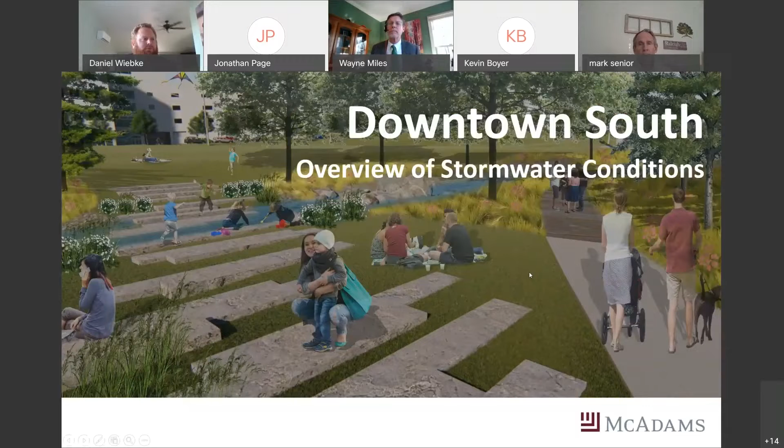All right, so I'm Daniel Wiebke, as Jonathan said, stormwater engineer, professional engineer in the state of North Carolina, starting working on the Downtown South project. Downtown South is a project being undertaken by multiple entities, but Kane Realty is the primary developer. So, slide.

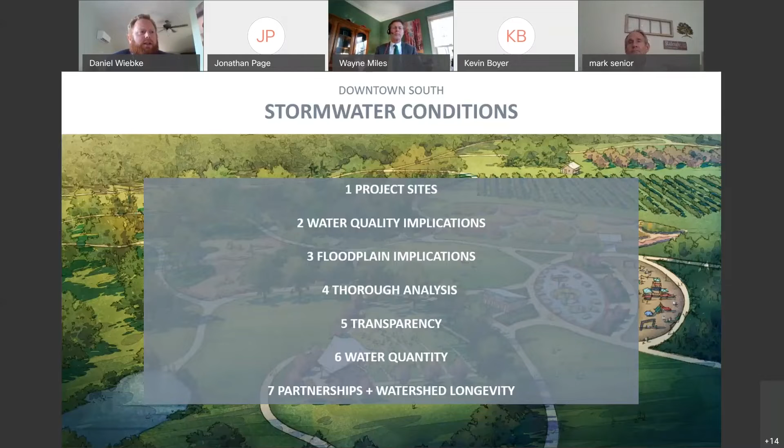So there are 7 major conditions that we've talked through with Planning Commission and stakeholders. There's definitely been some stakeholder engagement, talking to nonprofits and such, and I'll talk about that more later. But I'm going to show you where the sites are. I don't know if you're familiar with those. Some of the water quality conditions we've discussed, the floodplain ones we've committed to, very in-depth analysis of the site and the greater watershed, some transparency from the development team as the process moves forward, water quantity, and then partnerships and the longevity of the watershed beyond just the project itself. So I'll get rolling. Next slide.

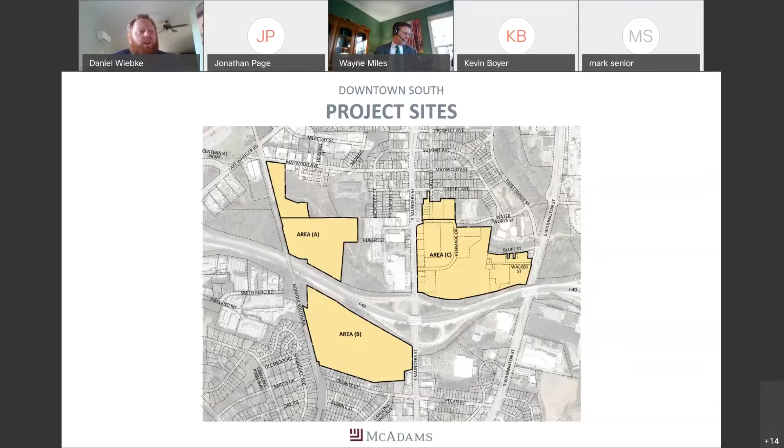So you'll see here that there are 3 major tracts: area A, B, and C. As I'll show you later, areas A and C are on Walnut Creek. B is to the south of 40. Drainage comes from area B, both to the northwest and northeast, through linkage by Wildcat Branch, which is also, I believe, a FEMA recognized stream. So there are definitely natural water bodies and stormwater implications with this project. The total area between all 3 parcels is, I think, 148, 150 acres, something like that. So definitely a large project. Next slide.

But then we had some external discussions with some stakeholders and another engineer, Chris Bass, who had written a letter on behalf of some of the neighborhood residents. We've had great conversations with Chris, members of One Way and Partners for Environmental Justice and some other stakeholder groups, to name a few.

After talking to them, we stepped it up a bit. Since stream degradation is one of the big points Chris Bass and the community were really worried about, we said we'll go ahead and treat the difference in the 1-year storm pre to post, so make it no worse in that storm. If for some reason there is a greater difference than that and the 1.34 inches...

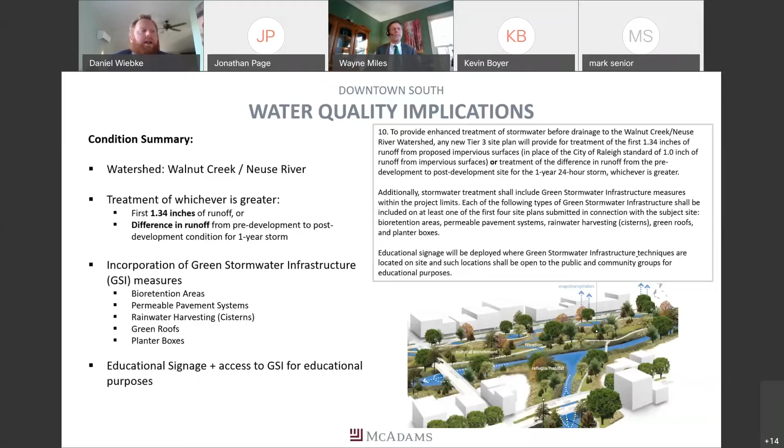Again, we will also be incorporating green stormwater infrastructure measures. We think it's very important to put those on site and create educational opportunities, to leverage not only the development but also the city of Raleigh's desire to push this program forward.

One of the implications is something the SMAC had advised on last year, maybe, that there's a text change coming for floodplain. So essentially we have adopted that, though the text change for floodplain is not through yet. We've gone ahead and said we'll be compliant with that.

Essentially, not really doing anything in the floodway, but in the floodway fringe, trying to reserve that for ground level uses. Really, the best thing to use there is parks. There may be minimal trails and a picnic shelter or something like that, but we're really trying to keep the building footprints outside of the floodplain and floodway fringe to prevent any kind of losses or obstructions to the floodplain.

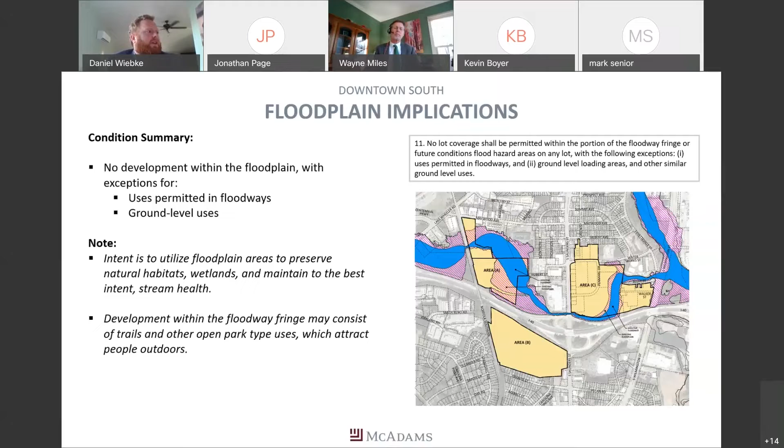We and the stakeholders discussed this, and in particular I'll mention Chris Bass again, because he's represented a good many of them from a professional standpoint. He's also a stormwater engineer. So we've had really good discussions, and our goal is to make things better if at all possible, and certainly at the least not make anything any worse.

With that, we talked about some different storms to look at, and what we wanted to do was say, well, we don't know everything now. At rezoning there may be some site sketches, but there's no detailed analysis of all the on-site conditions. Just for 150 acres, that's a huge burden. So what we wanted to do was set up a framework in which we could look at what the development would do through the process and make good decisions.

So with that, we kind of did some if-thens based on what the analyses show as we move through those. Knowing there are 3 sites, we may be at a more detailed stage with one than another. We're not going to know everything at site A when we're working on C, but as site plans for sites A, B, and C come in, we'll be updating that analysis, constantly ensuring we're doing what's best for the area.

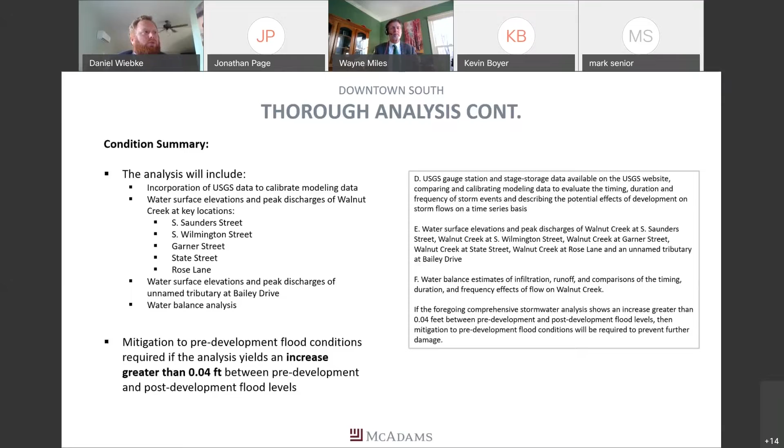So again, we'll be looking at water surface elevations, velocities, and generally the peak flow coming through there. One caveat is that mitigation to pre-development flood conditions will be required if the analysis yields an increase greater than 0.04 between pre-development and post-development flood levels. That's in the ordinance, but just echoing it here—this is measurable, and beyond 0.01, 0.02, not to get too technical, sometimes that can just be a modeling thing. But once we start seeing something a little greater than that, that's actually measurable and you might see a real world impact. So that's where that came from.

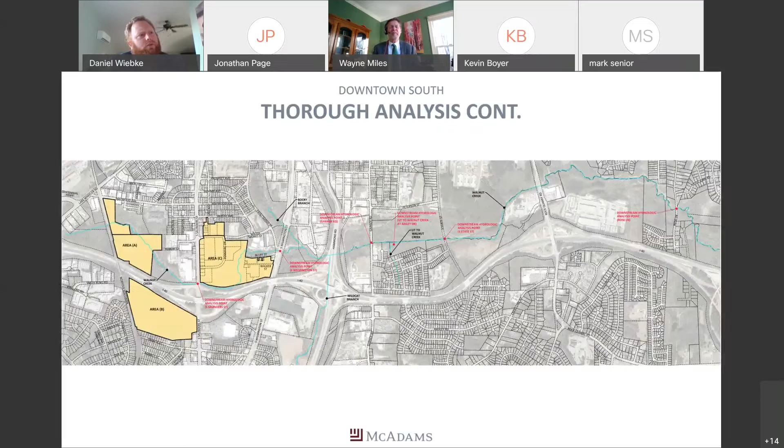Next slide. So these are the points. Again, the first red area is South Saunders. The next red dot is Wilmington. The next red dot is Garner, then State Street, and then the furthest to the right there is Rose Lane. Next slide.

Another part of this is transparency. As we go through this process, once we've got calculations pulled together, we submit to the city, but we also want to keep it accessible, not jumping through hoops for people to get access to the information. So plans, sealed calculations, that kind of thing, we'll host on the website. The website's actually live. If you go to the Downtown South website, at the bottom there's a 36-page pamphlet, and the zoning conditions thus far are already in that pamphlet. So if you want to see the full list, they're there.

Water quantity is probably the thing most people want to make sure doesn't shift or change too much. It's about making sure peak discharges during storms do not get worse or exacerbate problems that already exist or create new ones. We've already done some preliminary analysis showing that in some situations, letting water out a little quicker in certain areas may actually help the watershed so it doesn't line up with other parts of the watershed, but in other instances it may not. So we wanted to build that variability into the ability of the development and the review process.

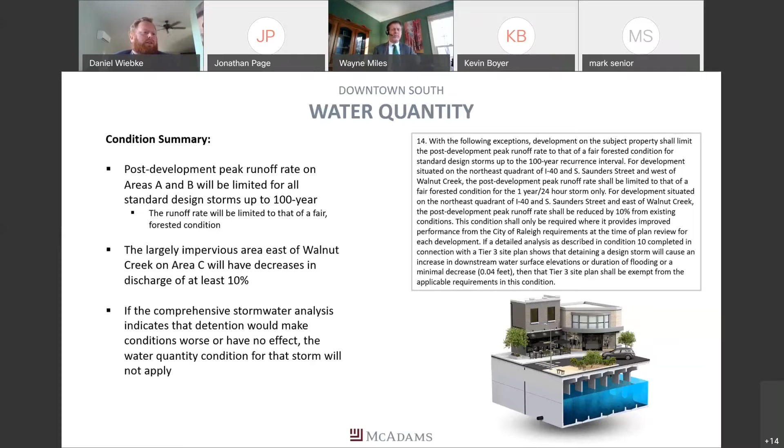Lastly, if the comprehensive stormwater analysis shows that holding back the 10-year storm will hurt things, but we need to detain the 25-year storm, then that's what we'll do. Essentially, we've agreed to these conditions, and we want to do what's best for the creek because it's best for the creek, not just because it says we're going to detain the 25-year storm whether it's good or bad. That's really the thought process we have in mind here.

So the last point here is partnerships and watershed longevity. This is really just a commitment by the developer to positively impact the watershed.

After the second site plan is approved by the city of Raleigh, 5 business days later they will put $150,000 in an account that can be used to match another grant to be implemented within the Walnut Creek watershed. So they build a building or two, start getting some revenue in, and then they're able to help fund other projects. This isn't related to our project—these are other projects in the Walnut Creek watershed that would improve water quality, mitigate flooding, restore streams, and restore wildlife habitat.

To put that in another light, they put the $150,000 in there, and maybe a year or two later there's a huge project that costs $1 million. After multiple site plans, once the $150,000 builds up, it could reach a maximum of $750,000. Now what could happen is somebody else comes in with $750,000 and matches that, so you've got $1.5 million. That could fund a project like raising a road that's flooding downstream, or making a culvert larger, or creating an impoundment.

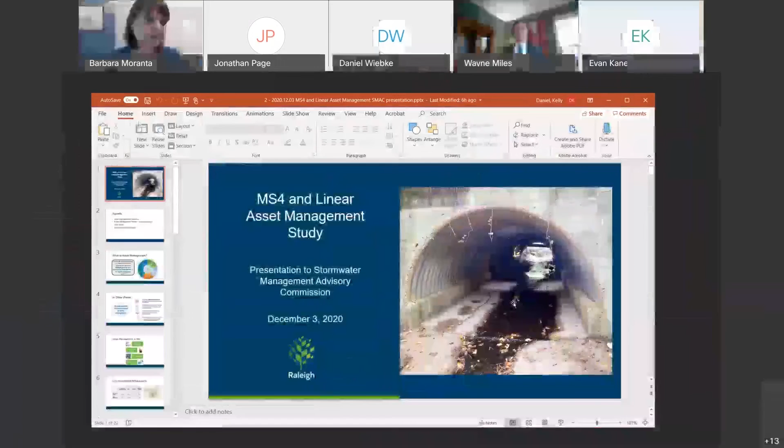I'll start off with an overview talking about what asset management is, what assets we're managing, and what our system challenges are. Then I'll turn it over to Chris to talk about our phase 1 asset management project, which kicked off in July. Then we'll discuss next steps, and we welcome your feedback. So we have time at the end for questions and discussion. Next slide, please.

Okay, so what is asset management? We'll start with the definition in the box, and then talk about what that means for Raleigh Stormwater. Asset management is a way of doing business that allows utilities to achieve the desired level of service, an acceptable level of risk, at the optimal life cycle cost. So you may be asking, well, what is this way of doing business, and how is this different from what we've been doing for many years?

In actuality, we have been doing many pieces of this asset management process. So what we're doing with the asset management program is building upon what we've already been doing, and also developing in a more formal way, a method to evaluate priorities and system risk. We'll spend a few minutes going through this asset management process shown in the circle on the right-hand side of the slide, and talk about what that means for Raleigh Stormwater.

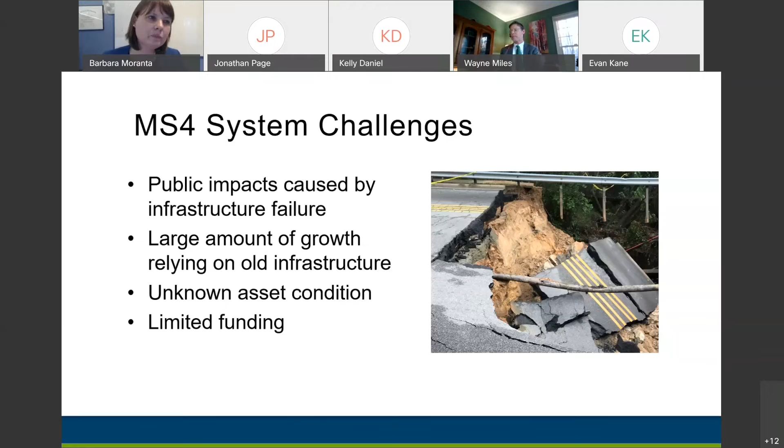Which leads to our next challenge: our asset condition is unknown, and we need to go out and inspect it in a cost-effective way. Funding is also a challenge, and this is not uncommon for any municipality with aging infrastructure. We need to get a better understanding of our funding requirements that will allow us to create a more proactive program.

And with that, I'll turn it over to Chris Nesbit with CDM Smith to talk about our phase 1 project. Thanks, Barbara. Okay, so there were three important questions that we wanted to make sure we answered as part of the phase 1 project: what is the basis for funding needs, where to go spend the money, what are our priorities, and then how to proceed from here and getting into the details. I'm going to be talking more about each one of these.

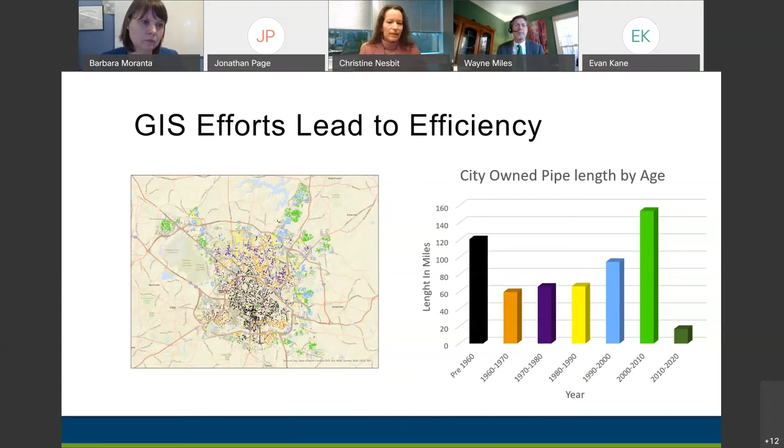Next slide, please. I wanted to go over a couple of those best practice assumptions that we're providing now and will refine, with two examples. First is the condition assessment. Right now, based on what we know, we'd recommend assessing 10% of the system per year for the next 10 years. So in 10 years, Raleigh would know the condition of all of their assets.

The cost of doing that depends a lot on whether you need to clean the pipe before you can look at it and see what condition it's in. That can get expensive, so right now we're assuming 30% of the pipes would require cleaning in order to properly assess them. Putting that all together, the result is $1.6 million per year in annual funding as an initial estimate.

On the rehabilitation side, I usually recommend a minimum of 1% rehabilitation per year. That's based on a theory that a pipe will last 100 years. So if you rehab 1% a year, in 100 years you will have made it through your whole system, and in year 101 you can be rehabbing the pipe that went in today.

Now, Raleigh and many other utilities have not been investing 1% rehab per year, so we started with an assumption that 1.5% per year would need to be done. Again, costs can vary depending on a lot of things, but using an average cost of $150 a foot, that result would give you $8 million a year in annual funding needed to rehab the system.

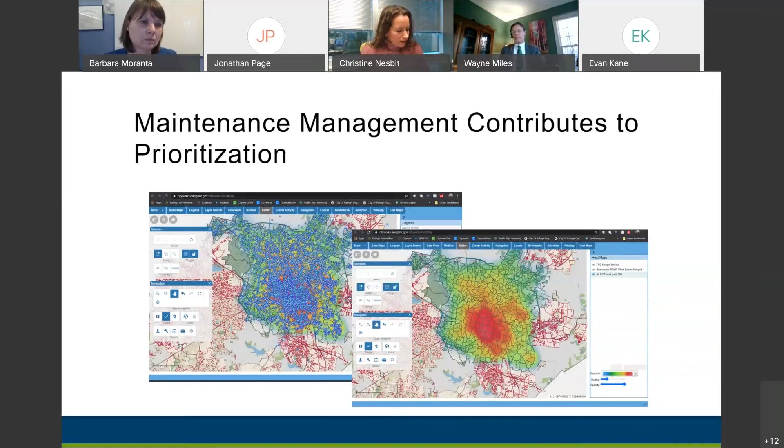How likely is it to fail? A 1 would be good condition, not very likely to fail, and a 5 would be poor condition, likely to fail. We'll also be giving it a consequence of failure - what is the consequence if that asset fails? A 1 being low consequence, like a small pipe on the end of a neighborhood court failing. A 5 would be high consequence, like a large pipe under a major road or near a critical facility like a hospital, which would have a big impact if it failed.

Okay, ideally we would want to base likelihood of failure, I think Barbara mentioned this, off actual condition assessment information. This project is setting up the city to gather that information. But like we mentioned, that might take up to 10 years to get the information on all the assets. So for right now, we can use surrogate factors like age and material, and like the heat map I just showed you, to help prioritize where to go collect that information. We're going to the right areas in year 1 and year 2 of that 10-year plan, and to areas we're not as concerned about in year 9 and 10 of that condition assessment plan.

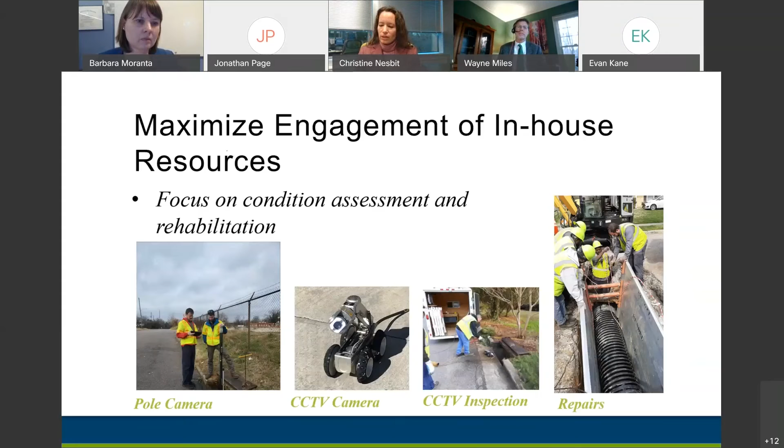And that's going to allow us to take all their results, both from the past few years and in the future, and feed them into this risk framework much easier. And finally, as we're going to identify some repairs that will be large and need to go into the CIP program, but to the extent feasible, we'll want to do those repairs in-house. And so we'll be working closely with the transportation field services staff when developing the system repair plan.

And so at the end of phase 1, which again will be next summer, we will have an annual rehabilitation and funding target set. We will have a risk-based prioritization framework, an initial list of the highest priority assessment projects, a plan to maximize in-house resources for condition assessment and repairs and rehab, a management system to store the information and support the risk model, and the tools to coordinate with the watershed planning program.

Okay, I'll close it out with the visioned next steps after phase 1, and then we'll open it up for discussion and feedback. So at the end of phase 1, we'll be ready to move into condition assessment of our highest priority projects. We can begin coordination with our watershed planning efforts and determine whether we need to rehab or replace certain pipes. And we envision continuing program assistance by continuing to work on our data and enhancing the completeness of the data, improving the efficiency of our data collection processes and technology, and also documenting standard operating procedures, which will help us to become more efficient.

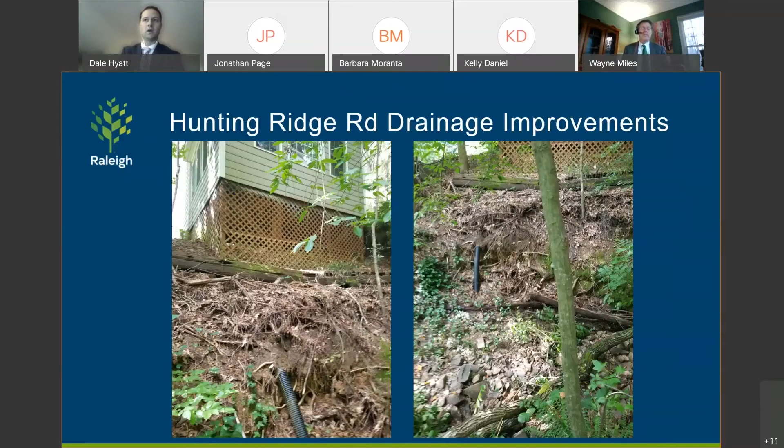The project will stabilize the stream bank approximately 80 linear feet where it threatens the structure. Given the change in elevation and the proximity of the structure, it will most likely be done with an imbricated rock wall, resloping, and revegetation in the vicinity of the structure. So that's 729 Hunting Ridge Road.

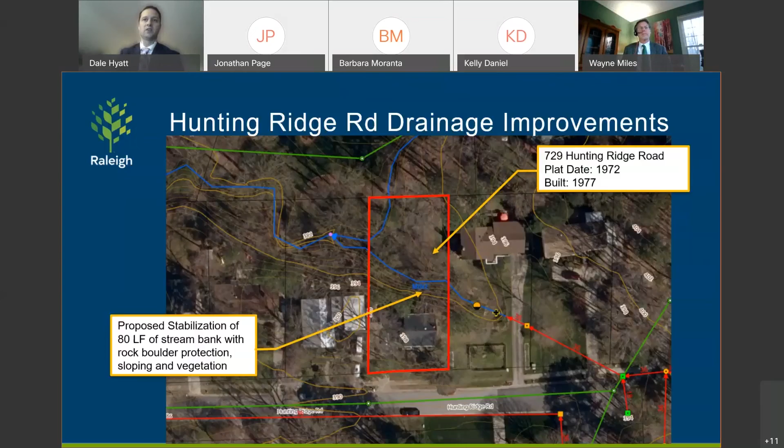Next project, 720 Beaver Dam Road. You can see through the GIS, the 24-inch RCP pipe actually runs beneath the structure. Platted in 1960, built in 1964. The property owner engaged a CCTV camera company to video this pipe after seeing some sinkholes in the yard near the foundation. That video was sent to us for review and showed longitudinal cracking and some ovaling, or egging, of the concrete pipe below the home, showing signs that the pipe is beginning to fail, and will most likely fail in the near term if not addressed.

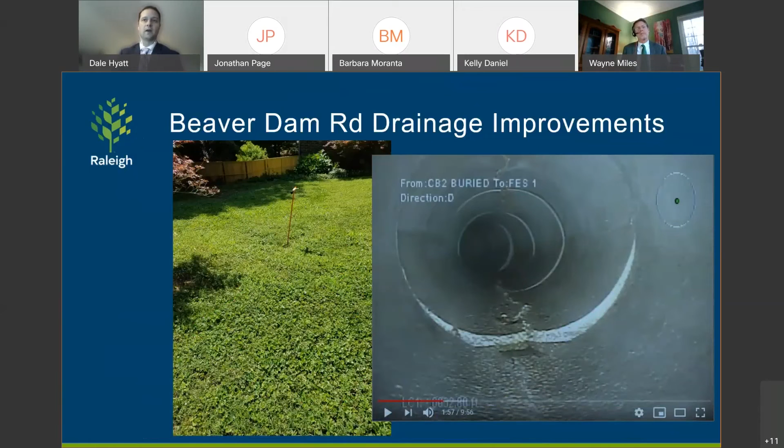This project will reroute the pipe around the structure, providing as much open channel as possible where we're not conflicting with utilities or where space is adequate. The old pipe will be blocked and filled with concrete or flowable fill, so the threat of pipe collapse no longer exists. Like this project and the previous one, as part of the drainage assistance program, we will acquire public drainage easements dedicated by the homeowner for both projects.

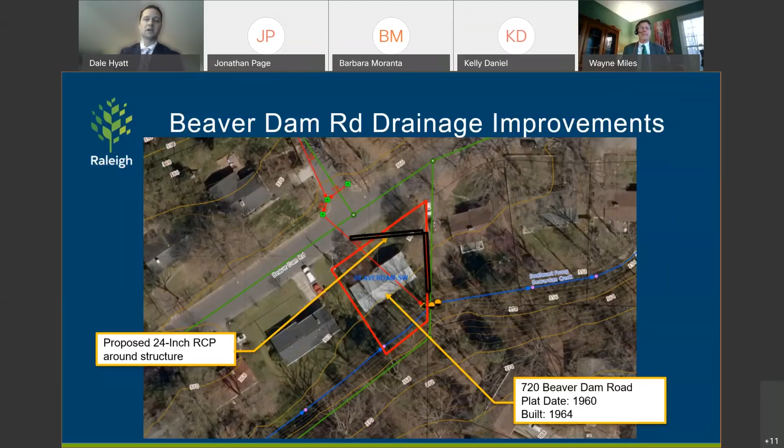Just a funding overview: 729 Hunting Ridge Road, estimated project cost of $180,000. Beaver Dam Road, estimated cost of $87,000. So $267,000 for these two projects for this period of review. Given the 4 projects approved in September, this gives us a remaining fiscal year 21 balance of $590,000.

So with that, I'm happy to take any questions, happy to flip back through any of the slides. Are there any questions from commission members for Dale on the Hunting Ridge Road project or the Beaver Dam Road project?

All right Dale, I'm not seeing any questions on either one of those. Actually, I've got one from Evan. Go ahead, Evan.

Real quick on the Hunting Ridge Road project, will stabilization of that stream bank result in any downstream velocity increases that might start to jeopardize or create erosion conditions a little further downstream? Looks like there's a couple more houses close to that stream, maybe not as close as the first one. Correct, there are a couple houses close, and we've actually done an old drainage petition project a little bit further down with one of these houses to do some stream bank stabilization.

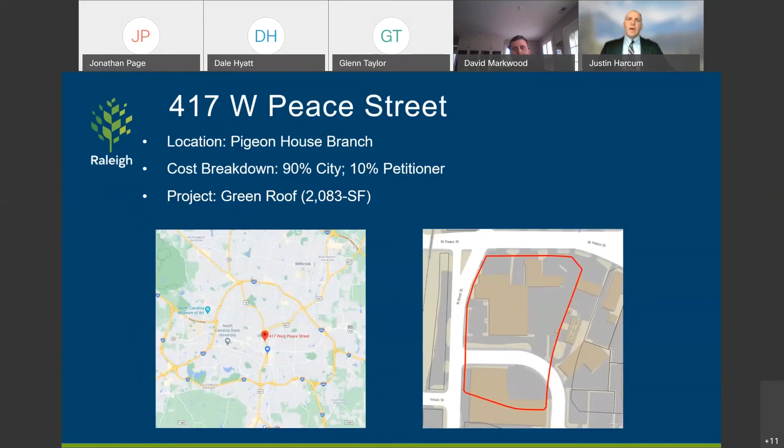The first project, as you recall, was the Smokey Hollow project off Peace Street. It's a 2,000 square foot green roof, eligible for 90% reimbursement. The commission at the last meeting requested pretty much three things for this project.

They requested educational signage be included in the scope. There was a request for some language in the maintenance agreement to address fertilization concerns for the green roof, and then also just a general re-examination of the overall costs.

In this revised projected cost outline, you'll see that signage was included as part of the project. They were willing to include educational signage. It's a nominal increase in the overall project cost, and I'll show some additional details of what they're proposing as we move forward.

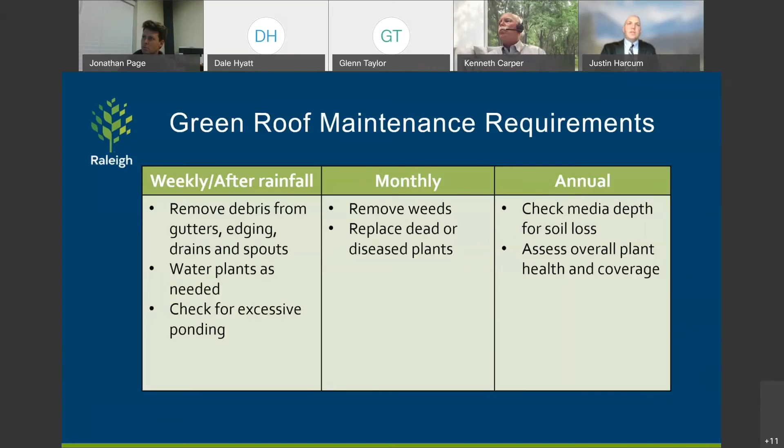All right, next slide. The changes didn't move a whole lot with the metric, but as you can see, it is pretty much where it was compared to other green roofs when we met last month. Next slide, please. This is once again a 10-year maintenance period and requires a land use restriction. Next slide. Is there any questions about the Smokey Hollow green roof application?

Yeah, Evan, go ahead. Justin, did you get any sense from the consultant about how typical that fertilization rate is for a green roof? When we met virtually with the installer, who Living Roofs is the contractor for both of the projects we're presenting today, and they're one of the only ones that really install these within the state, that is their recommendation that they give for their green roofs, and they stood by that.

I'll just make the observation that 11 pounds of 9% nitrogen is 1 pound of nitrogen applied annually, and we're expecting 1/3 of a pound at most to be removed. To me, that takes away any of the nitrogen removal benefit of the project. Their language did provide a range, I think it was 5.6 pounds to 11, but it's still that we took the range out and said not to exceed.

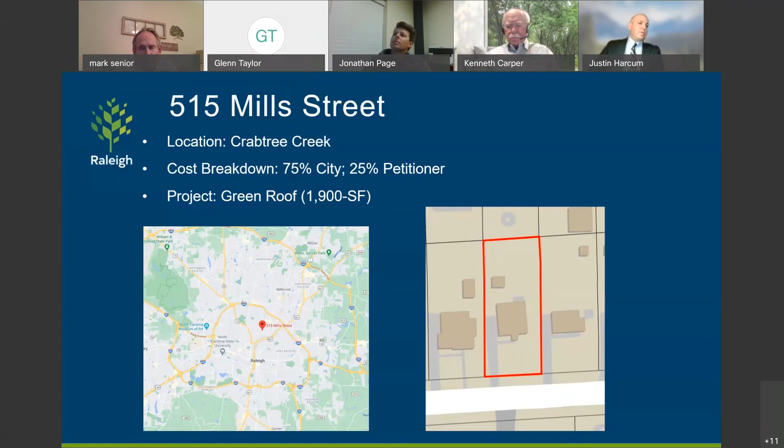Primarily by eliminating some costs that staff felt were not eligible, and also with the spirit of trying to improve that water quality metric. Next slide, please. Nothing really changed with the design other than the overall footprint. Next slide, please.

The main change here was a cost previously listed as the roof preparation membrane. After discussions with the applicant and the contractor Living Roofs, some membrane costs thought to be part of the green roof membrane were actually part of what would be used for a traditional flat roof, so staff felt that was not an eligible cost and removed it.

The applicant went back to the drawing board with Living Roofs, and they've come up with a new quote for a larger system for less cost.

Any questions on this slide? Yeah, I wanted to compare this one to the Peace project we just tabled. And what's the requirement for nitrogen replenishment on this, or is there any?

Are you saying for fertilization? Is that the question? Yes. They didn't particularly call that out, but the same contractor recommends that rate of fertilization for all of their green roofs, so that would potentially be in play here.

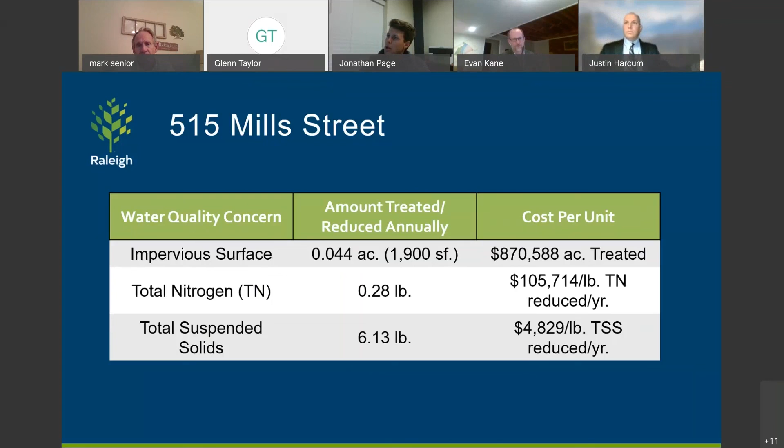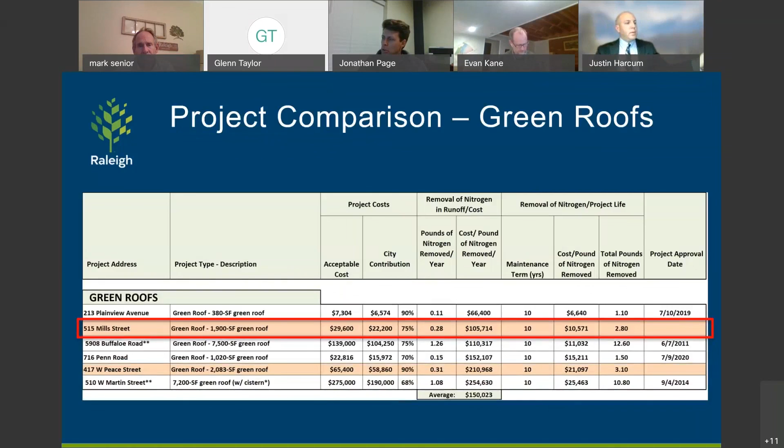Next slide, please. And next slide. Next slide. And that's all I have on 515 Mills Street.

Gotcha. Any other questions or comments on this project, or how we think about green roofs at this point? No, I'd just throw in there—we've kind of looked at these things, and the two items we're wrestling with are the overall cost to benefit on them, and the whole idea of fertilizing green roofs just isn't appropriate to me.

But I wanted to add that the city of Raleigh explored green roofs and came to the conclusion that up north you don't have to irrigate them—they do pretty well—but down here in the south we have to irrigate those. We determined they're probably not an appropriate stormwater management tool in the southeast for our climate, so I'm wondering if we need to revisit the whole idea of green roofs.

It's something we support, and I hate to do this to the people in the middle of this process, but looking at these two projects, it's kind of slapping us in the face that we've got an issue we need to deal with. Are we going to support green roofs or not?